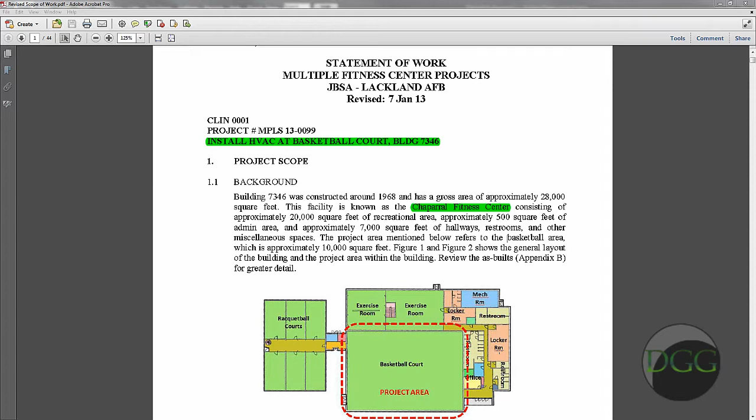Now, there are some unique things about this project, and that is that the racquetball courts and all of the adjacent facilities will be in use. So we will have to protect the basketball court floor during the demolition and the reconstruction, and we will have to confine our work to this space right here and make sure that all of the adjacent spaces remain usable, and we have to assume that they will be in use during the entire course of construction.

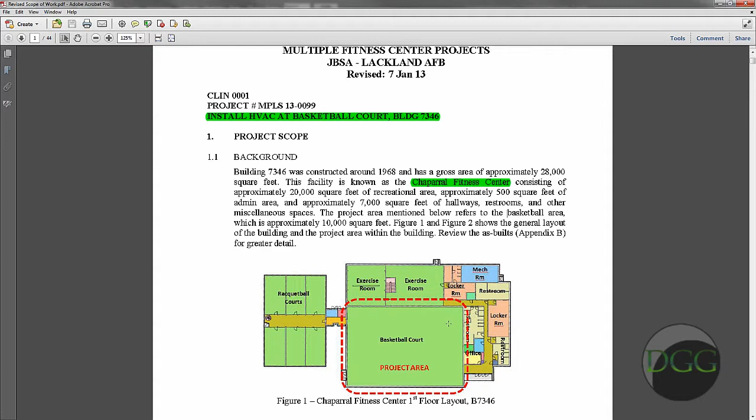So we'll be looking for some laydown areas, hopefully in this space right here or somewhere right out in this space right here, and the demolition work is going to be taking place inside here, and I'll get to that in just a second. Okay, so this is the scope of work letter that was attached, and you can see that this is the existing heater that is to be removed from the site, along with these 3 existing exhaust fans.

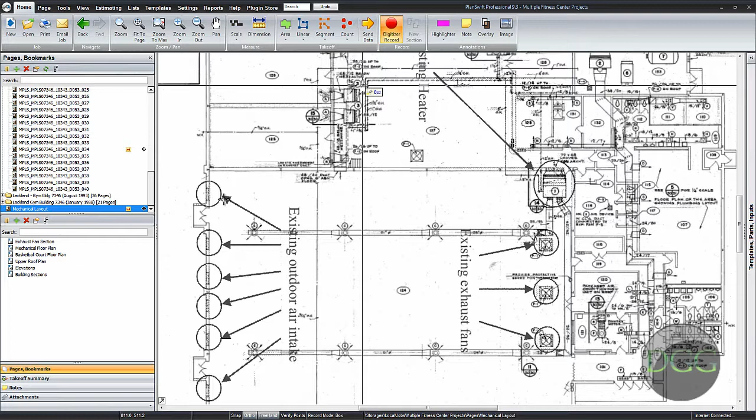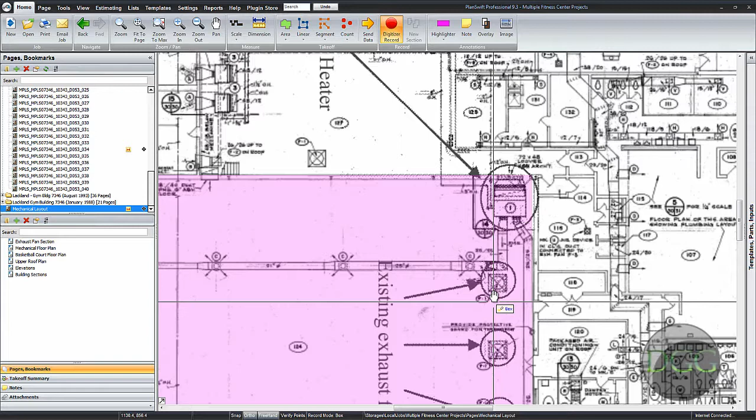Alright, so the roof of the building in this particular area is lower than the roof in this space. Let's just highlight the gym. So we can assume that when we remove this heater, and you could see there's a louver right there, there's going to be a hole in the wall right here which we're going to have to take into consideration, along with the holes that we create when we remove these 3 exhaust fans from the roof.

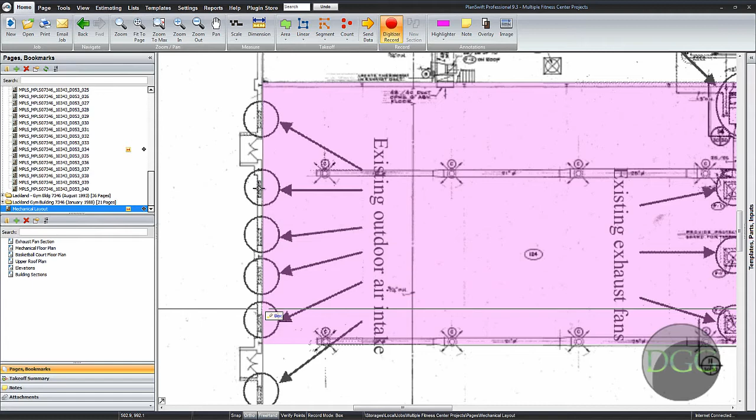Okay, along with that, there's some existing outdoor air intake louvers that are in the walls of the gymnasium, and you can see them as indicated right here. 1, 2, 3, 4, 5, 6. So what I'm going to do now is bring in some pictures to show you the existing conditions and what we're faced with and how I intend to deal with the fact that all of these spaces need to remain operational. So I'll be right back.

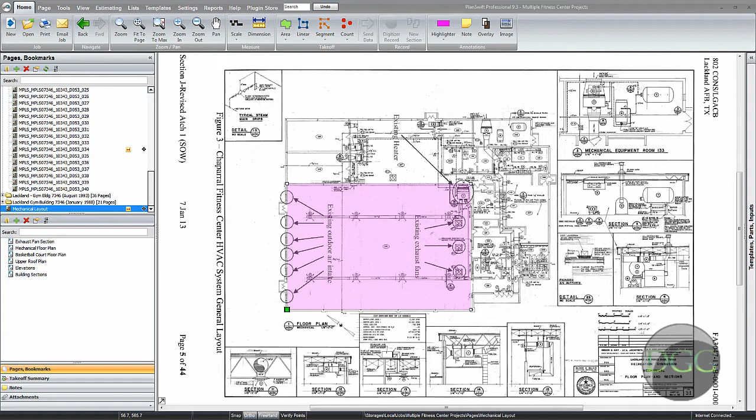Okay, so here is the picture of the gymnasium, and here are the existing outdoor intake louvers that we'll be taking out of the walls. 1, 2, 3, 4, 5, 6, and they will obviously create holes in the wall which we will have to fill in and refinish to match existing, both interior and exterior. And I'm going to show you the construction that we have to match in just a second.

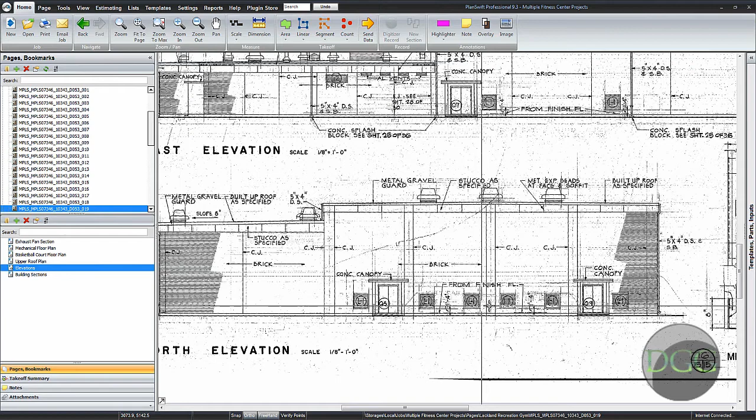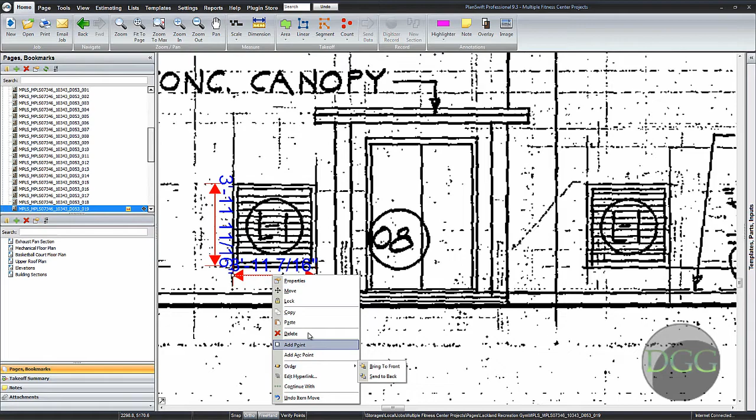Okay, so this is the elevation showing the existing louvers to be removed, and I'm just going to scale the drawing so that we can see exactly what size they are. So now that I have my drawing to scale, I'll go back, check the dimensions of each one of these louvers. A 4x4 louver. So you can see that we have 1, 2, 3, 4, 5, 6 of them to remove and replace with existing CMU and brick construction. And I'm going to go to that detail in just a second.

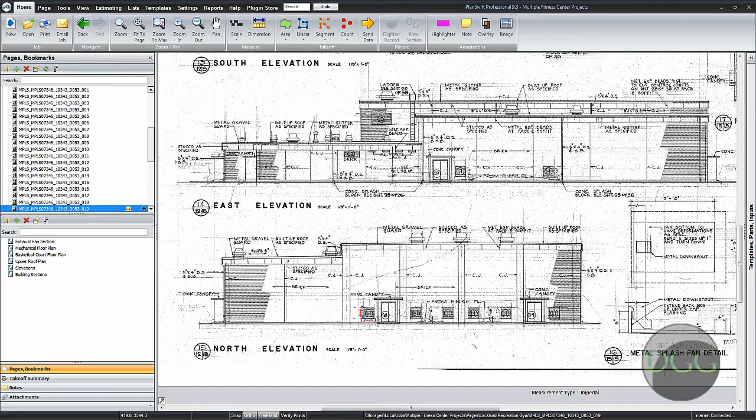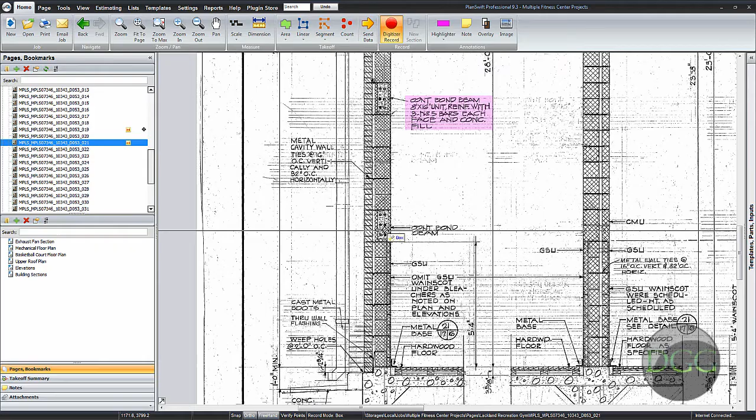Okay, so this is the detail of the exterior wall, and you can see what's interesting is that there's a bond beam right there. And so I'm thinking that the bond beam is there, right over the top of the louver, to support what's above it. So I was looking and I noticed this little note right here, and I still don't know what that is. Some sort of wainscot, probably some sort of a paint coating. So I went back and I wanted to bring in the picture once again, to show that there doesn't look to be any wainscot or anything on here.

But one thing of importance is the fact that when we go to paint this wall, due to the age of these finishes, it's highly likely that we won't be able to match it. So I'm thinking that we should consider painting this whole entire wall in this space right here. So that's probably what I'll figure.

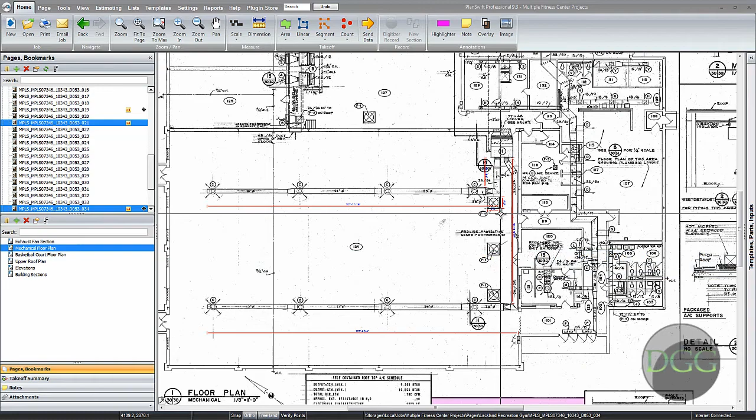So now moving to the exhaust fans on the roof. After scaling this drawing, we can see that we're going to have three 4'2" openings that we are going to be creating by taking out the exhaust fans on the roof, and then we still have to look into this opening that we're going to be creating right here.

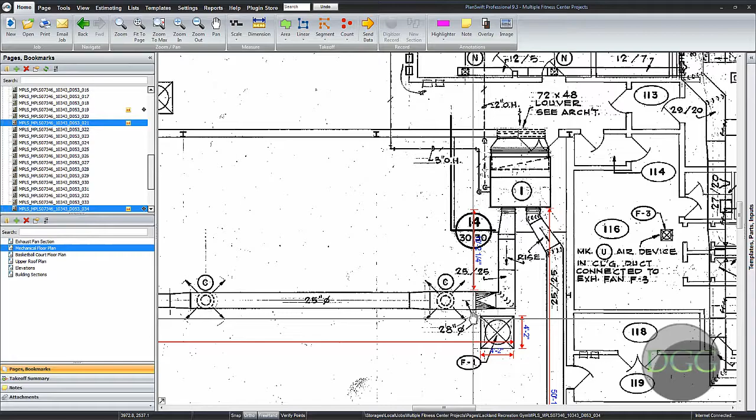Also, I remember reading that we should consider utilizing some of these openings for makeup air on the new system. So that's a question for our mechanical engineer. Does he intend to utilize this opening, or does he intend to put a system on the roof and utilize one of these 3 openings? That's a question that needs to be asked.

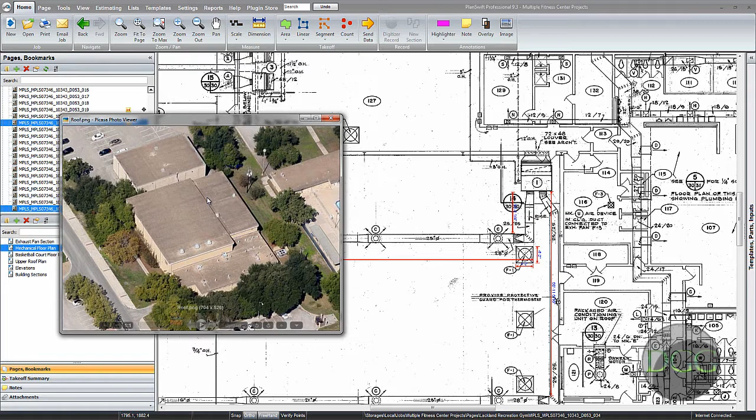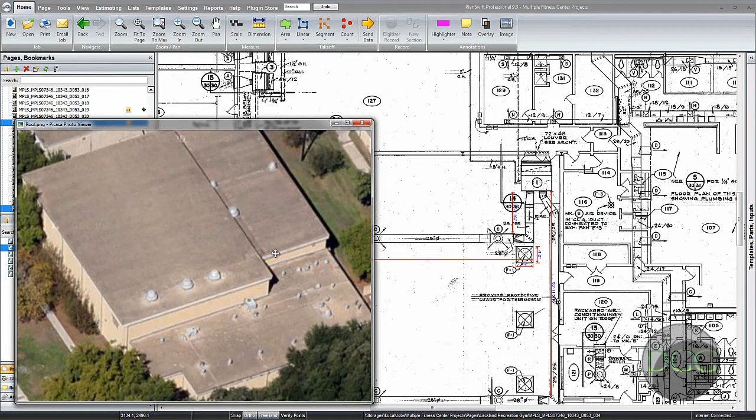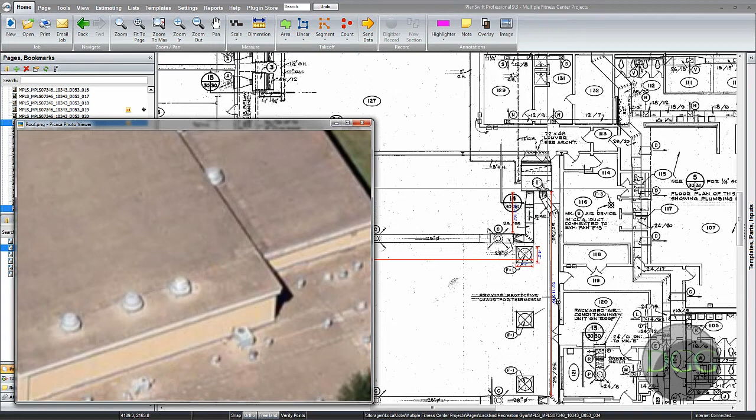So let's go look at the picture of the existing roof condition, and then we can take a look at this. Okay, so here is the picture of the roof condition, and if I zoom in, you could see that here are the 3 exhaust fans on the roof, and then that heater unit is going to be right here, and just like I said, here is the roof, which is lower, and there's bound to be a louver sticking out the side of that wall right there. 72 by 48 louver, which I will see if I can find a section on. Nevertheless, we're going to look into taking this out next.

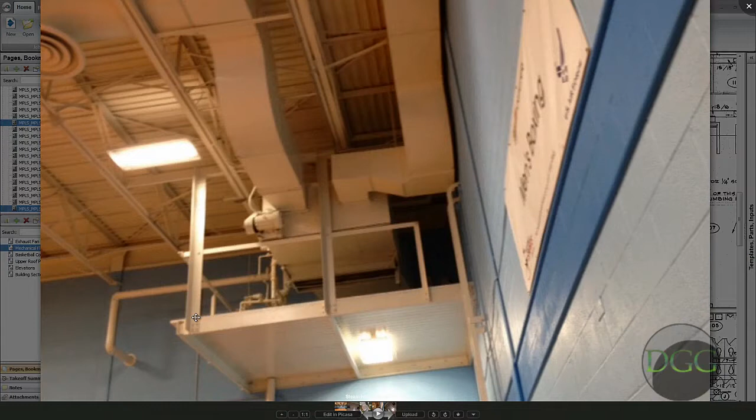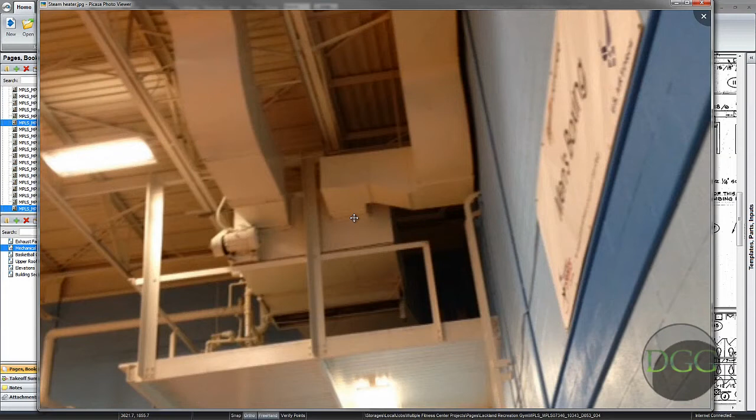So the question is, how do we get this out of there? Right? So we're going to come up here, we get some guys up here, we cut this off, and then we got this big old unit that we're going to be on top of a basketball floor with. So it's either going to chop it up and put it out the hole right here, or we put a man lift inside the gymnasium and pull it up through the roof, or we put it down on the floor and take it out through the doors. No matter which way you look at it, it presents some sort of a logistics issue that we'll have to deal with in the estimate, and that's certainly something that I'll take into consideration.

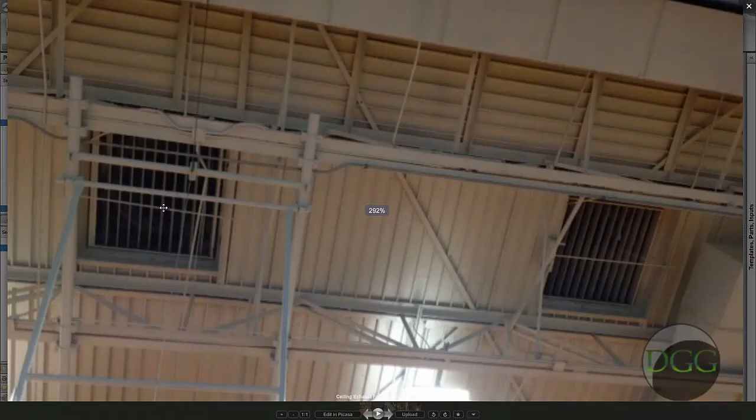Okay, so these are a picture of the other 2 holes from the exhaust fans that we'll be removing. You can get an idea that that's going to be a pretty good hole, 4 foot by 4 foot. And the roof section is going to look like this. Okay, so when we remove the exhaust fans, this right here will be 4 foot 2, and we will have to replace this deck.

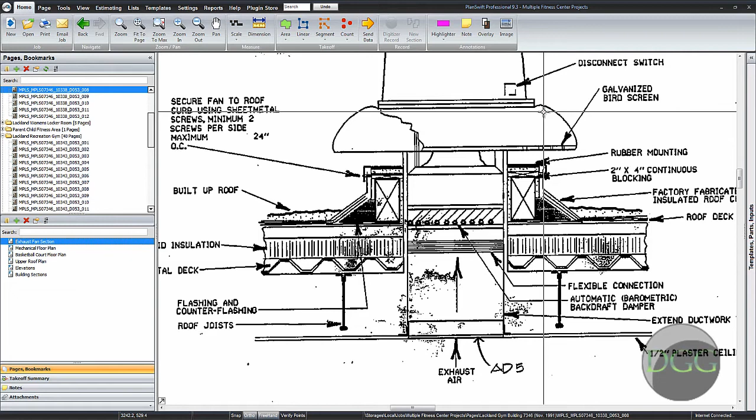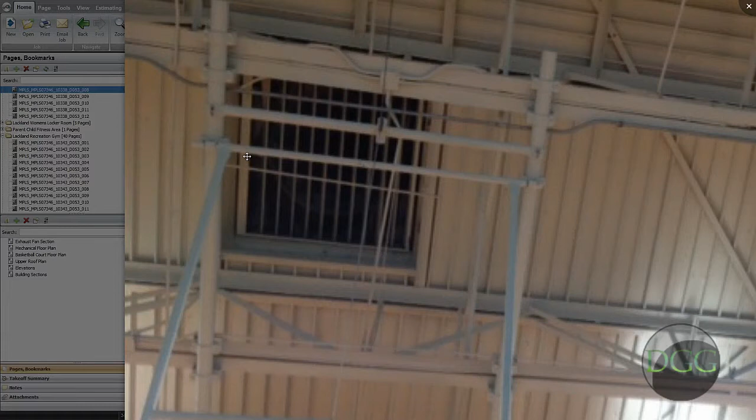And it looks like, taking another look at that, there's some framework that's in there already, so we'll be able to weld to the existing framework. Looks like channels. So I'm not going to figure any framing. I'm thinking that the existing framework will be sufficient to weld to.

Okay, so once all the demolition is complete, then we will be providing a new air conditioning system that ties into the existing energy management control system front end that currently uses Niagara-based BACnet protocol. Okay, here's the interesting part. The energy management control system front end is currently operated and maintained from building 5595 room 111. So that's not this particular building.

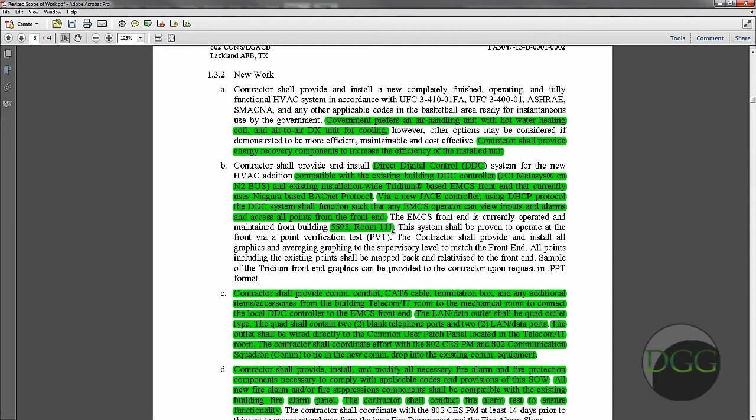So the operations are controlled from another building, which causes me to wonder how we get the information from this building to this building. And it makes me think, first thing is, where is this building and how far is it, and do I need to run communications there, or is it wireless? So that's my next thing. I'm going to go check and find out where this is.

Okay, well, I wasn't able to find building 5595 with the documents that I have, so that remains a question to be answered, and I'm not sure whether I need to concern myself with that or not, so long as the mechanical engineer and the mechanical subcontractor knows about it.